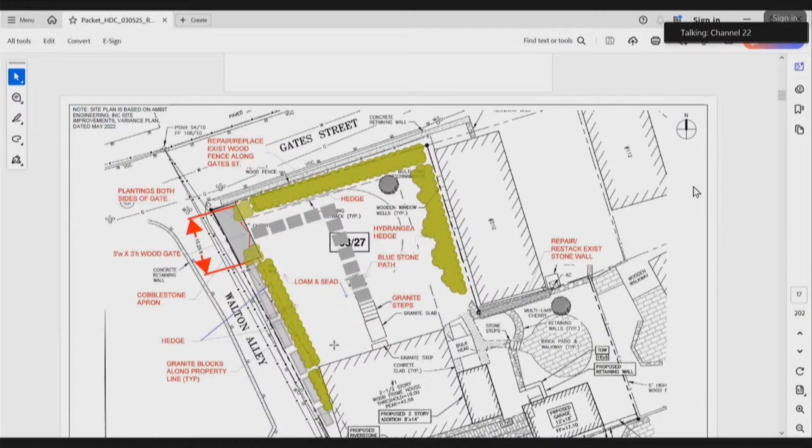The applicant for One Walton Alley was here last month. They are proposing to replace and repair an existing fence that in some spots was removed and in other spots needs to be repaired. That would wrap along Gates and Walton Alley. The other part is they were hoping to install a sort of country English style gate.

The commission was not entirely on board with that particular design, so the applicant has come back with this style design. It more closely matches the existing fence that's at the property that they would be mimicking as well.

I like the puppy. Any comments or questions on that? Anybody good with that? I would just say it's appropriate to what's there now, and I would support it. Great, thank you.

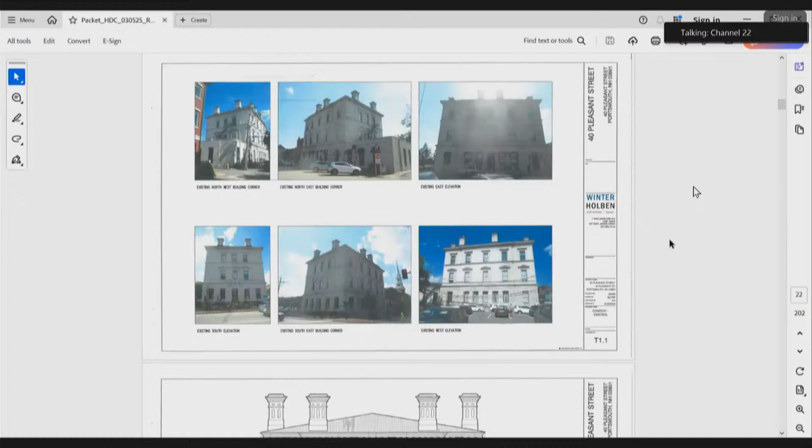That will bring us to item number 2, which is 40 Pleasant Street. This project actually came before the commission a couple of years ago. It has since lapsed. However, the only portion they're asking for this time around, with new owners of the building, is just for the lighting component. We have several existing photos, and they have shown all elevations where the lighting would be installed on the second and third levels.

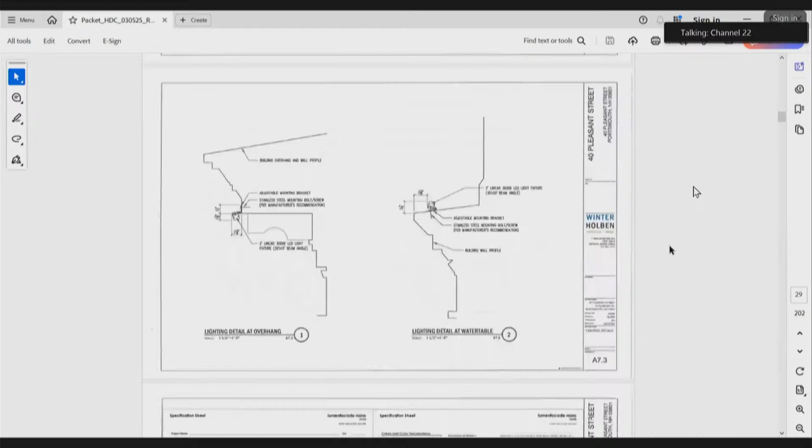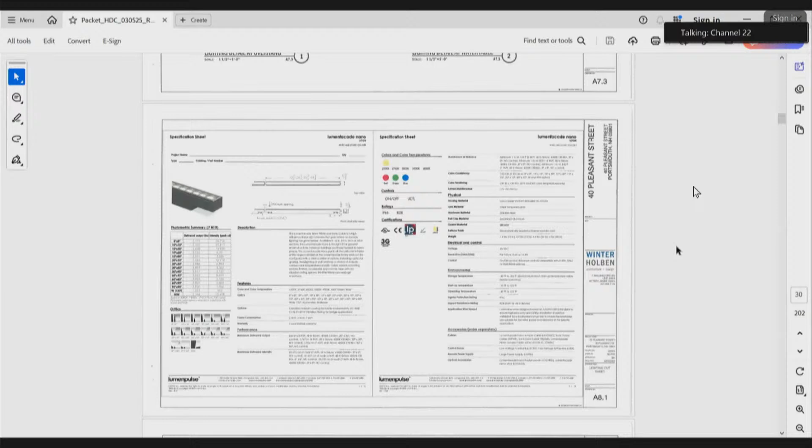We can see, of course, during the day, and then what a sort of mock-up at night would look like. They've also included a spec of how the light fixture would be installed and of the light fixture itself. Again, this was approved a couple of years ago. Any further questions on that item? Seeing none, I will move on.

The next item, number 3, is 39 Holmes Court. This project came before the commission about a year or two ago for a public hearing. What they're asking for, because it was not detailed in the plans, is for the decking and railings for a side entry and a third level emergency balcony.

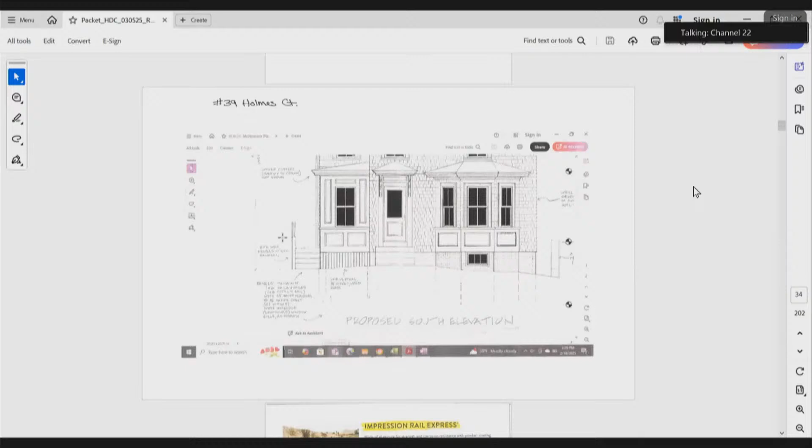Here's the elevation showing the entry where the railing and the decking would go. They have chosen this impression style rail in aluminum material in black, and then this would be the color for the actual decking. We do have a sample of that if anybody wishes to see. It is a TimberTech. Isaac, do you know what facade the escape balcony is located?

Already there, and they're just adding the railing? Exactly, yes. And that was something we did approve. It was needed by code for fire safety. It's just the material that's different. Just the material, exactly right.

All right, any further questions for that? Okay, we'll move on to item number 4, which is 43 Holmes Court.

Similarly, this project came in tandem with the 39 Holmes Court project a couple of years ago. What they're asking for is to change out just the brand of window. They were approved with a Green Mountain window, and they are asking for a LePage window, so of course it would be all windows that were approved for Green Mountain. This is new construction, by the way. And here are the LePage specs.

I'm not sure if anybody had further questions on the change. I believe it was due to the time frame of getting the Green Mountain windows. Does anyone have experience with LePage? That's a new name for me. It is a good one. Yeah, we've approved it in the last 3 or 4 months.

The screens, they did not say screens, but we could stipulate half screens if they're installed on the double hung windows, half screens. Okay.

Item number 5 is 93 State Street. This project came before us for a public hearing for a renovation. The last remaining items were the doors on State Street and Chapel Street. We did a couple of site walks. They have proposed 2 new doors that would be very much in style and in kind to the doors that are there now. Does anyone have further questions on the type of door or how it would be installed?

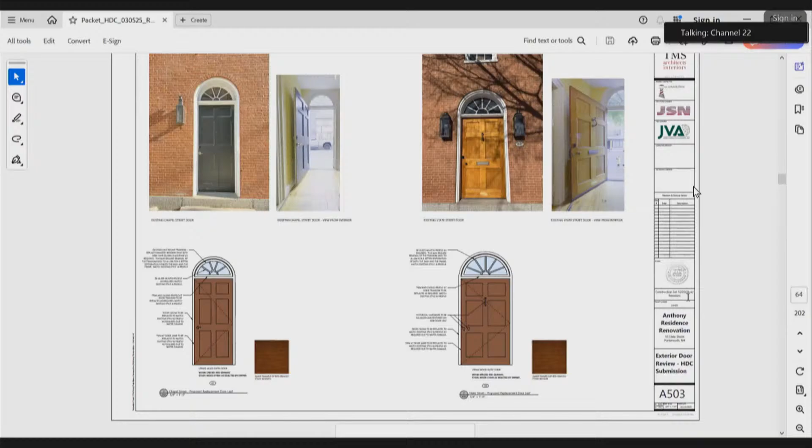I know we have the applicant here if need be. Yeah, I have all the questions in the world. Are these doors, the existing doors, does anyone know the age of these doors? Anyone that went on the site walk, because I was not on the site. I did go on the site walk. I don't know who else went. It's clear that the front door, though the wood is beautiful, is not an original door. It is older, but it's starting to...

It's not a lacquer. What is the finish on the door? Varnish. It's Holly, I believe it's a varnish and it's faded and warped. It's so thick that you can't refinish it. So you can't strip it and redo it again? Okay.

How are they intending to remove the frame? And I see something about the half round up top, but I'm not really understanding exactly what they're doing with it. Are they using the half round over again and putting new glass in it? Is that what it is?

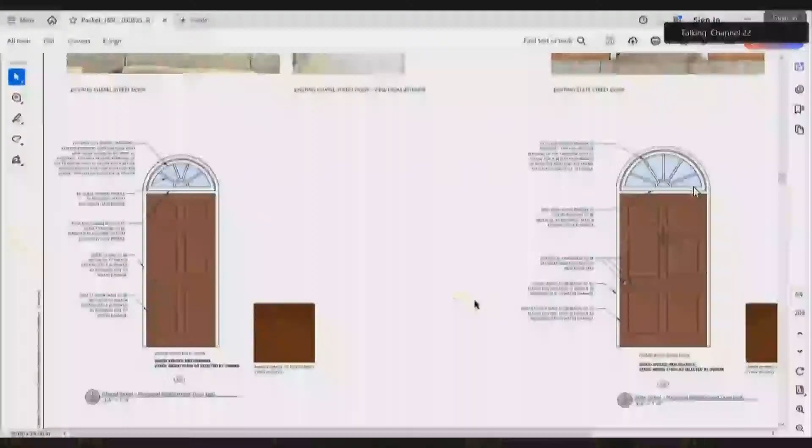So one of the panes has been damaged. Could you speak up a little bit, please? So one of the panes has been damaged, so we're replacing that, as far as the trim surrounding it, we'll have to replace that as well, just due to the nature of how you work with the existing window there. So that's the reason.

So you're only going to repair one broken pane? Yes. And where is that, on the front window? I mean, the front door, excuse me. That is on the Chapel Street side. So the front State Street side is okay? Yes, that's correct. And so would you be leaving that frame in there with the sash in place while you remove the door?

We're going to have the GC determine what makes the most sense in working with the window, the pane, and the unit. If he has to replace the entire trim piece, he's going to replace it in kind. And you'll be using the original hardware on that door, the hardware that's on the State Street side? Yes. Which was obviously reused on the current door. Yes, so it's continuing to use old hardware.

I don't know what to say. I don't want to vote against everything just because I don't like this project. Is it possible to pull it, or is it too late for that? Otherwise, I'll just vote against everything. I mean, we can pull this one and vote on it separately. Does anybody else have any concerns or questions about this?

That will bring us to item number 7, which is 121 State Street, Unit 2. This proposal is to take where a window used to be that has been bricked up and revert that back into a functioning window. As you can see, the window is located underneath this deck here, next to this set of doors. They are proposing to use a Pella Reserve Series double hung aluminum clad window that would match the windows on the rest of the building, in a 6/6 pattern as shown.

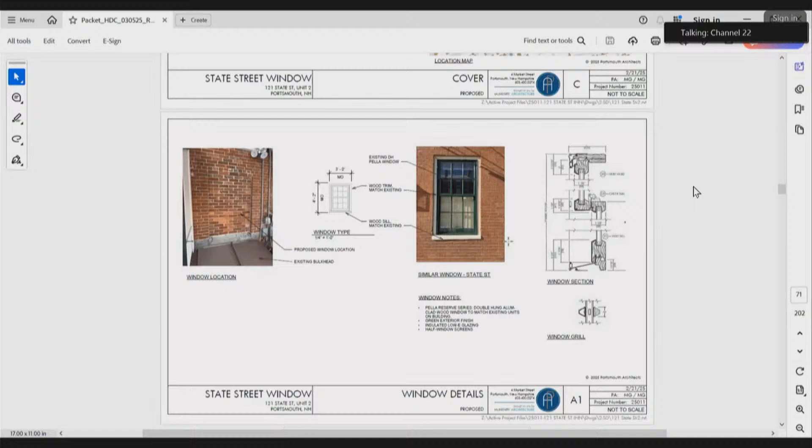With half screens, and a half screen can be stipulated if they do install. It's actually noted already. Perfect, window screens noted, as it's noted on the plan.

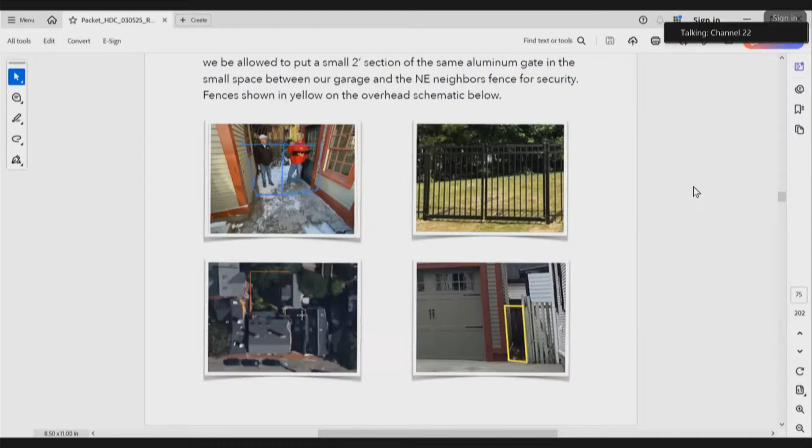Questions? My only question for this particular one is how the gates are going to be installed between the buildings. We have the applicant here who can clarify. They wanted to make sure the gates weren't being attached to the buildings themselves, but would be freestanding, with posts, and would swing from that rather than lean against the building. Okay, great, that's just clarification. Perfect, thank you.

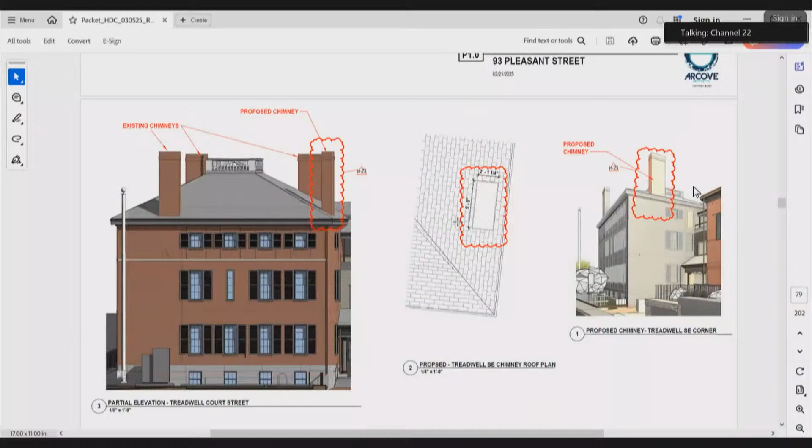Okay, so we will move right along to item number 9, which is 93 Pleasant Street. The applicant is here, and we've seen this project before. They are proposing two additional changes. One would be the addition of a chimney that used to be on the building and has since been removed. They would like to install that to bring it back to a more historic look. You can see the existing foundation right here, so they would propose to rebuild that. The second component of the application is for a series of porch awnings, which would be fabric awnings over a metal support, or a canvas fabric awning.

Not just simply to have something to say, but this is a groundbreaking project. We've had so many firsts on this one. I think, at least in my tenure, it's the first chimney that was proposed to be replaced on a building, and the first stone wall to ever be chosen to be replaced. It's a lot of firsts in this one. I think it deserves an upvote just on the basis of that. Kudos.

So our next item would be 10. Oh sorry, yeah, this one's fine. 10 Market Square is okay for you? I think it's just the last two, Larry. Yeah, the last two, yeah. Okay, so item number 10 is 10 Market Square.

Again, this property was before us last month for window replacements. They were asked to come back for administrative approval just to clear up a couple windows on the Ceres Street side. So we have just that.

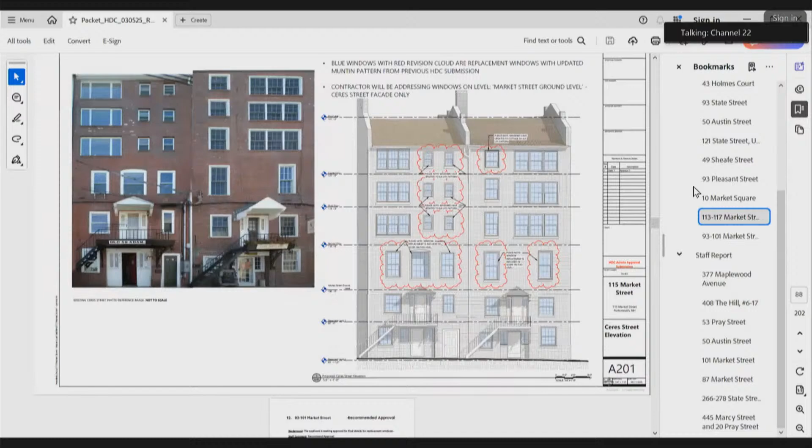Let me get over to the Ceres Street side. So here we are, I'll try to get that a little bit larger. And so here would be the proposed windows there. Again, it would be using the same brand, and they were just attempting to get a more cohesive look on the backside.

Do we have further questions on? Okay.

So we will move to item then number 12. This would be the property 93 to 101 Market Street.

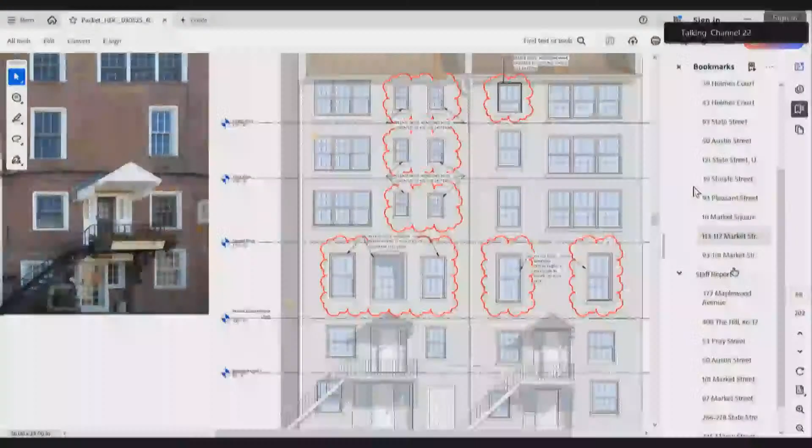Similarly, they were here last month for windows, same stipulation, just to come back and clarify some of the windows that we had questions on. So they have noted some of those window changes that we discussed.

And again, this just shows the front and rear sides. So again, just a more cohesive look between all of the varying sizes of windows. Same, again, same brand as proposed before.

It's nice to see them all presented in one plate like that so we can get an idea as to what's being accomplished. Thank them very much. Anybody else good?

Okay, well, I guess I sort of lumped those two kind of together. So if we are okay with voting on those together, we can do that, or we can split those apart.

I think we can vote on them together, they're very related projects. So if I could have a motion? So moved? Second? All right, all in favor? Aye. Any opposed? Chair votes aye.

Thank you. Just make sure they're half screened. Yes, that was part of the first one. Yeah, okay. All right, so we're through all the administrative approvals.

Next is our public hearing, new business. Number one, the petition of Kevin Shitan Zhang, Revocable Trust of 2017, owner, for property located at 377 Maplewood Avenue, wherein permission is requested to allow the demolition of a secondary structure and the new construction of a detached accessory dwelling unit and exterior renovations to the existing main structure to include new windows, doors, and repairs, and replacement of exterior features as per plans on file in the Planning Department. Said property is shown on Assessor Map 141 as Lot 22 and lies within the General Residence A and Historic Districts.

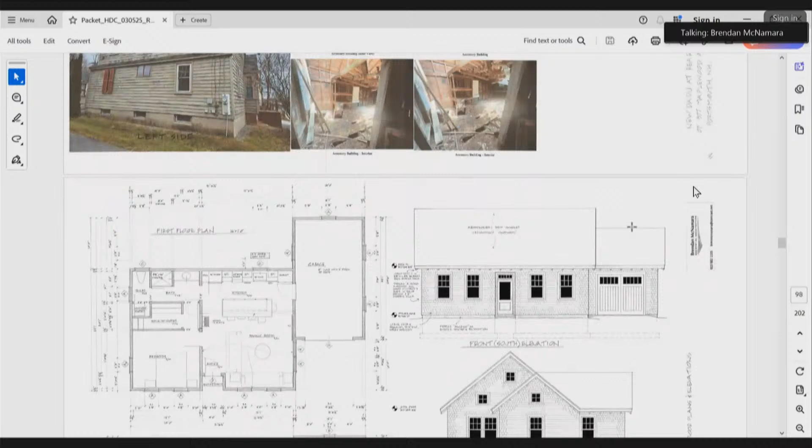Well, Derek has done an excellent job of his preliminary and has really covered the thrust of what's going on here. I think the plans are sort of showing what's proposed within the nature of the requirements of the detached accessory dwelling unit. The new building at the rear is meant to be diminutive to the principal dwelling unit, which I believe it is. So it is still in the manner of appearance of a more utilitarian building. And then we do have the repairs of the principal dwelling unit, which is in pretty rough state as well.

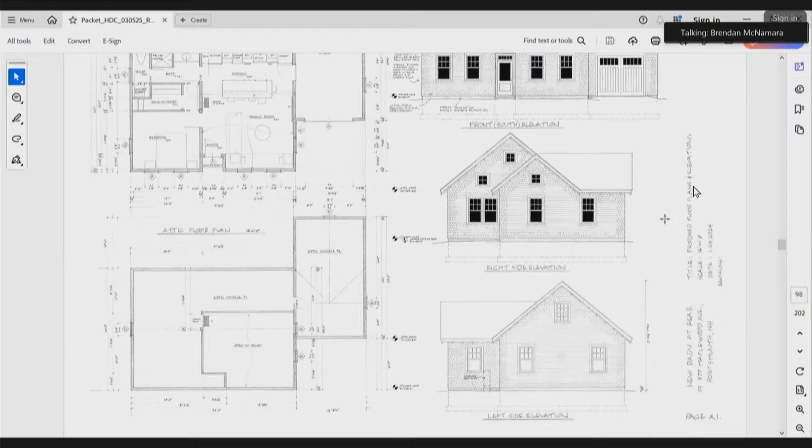Just to note, there is a specific change to the principal dwelling unit because of the need to create parking and turnaround. The existing bulkhead, which is on the rear of the principal dwelling unit, needs to be removed, but we still need to have egress to the basement area, which is why we have a grade egress window proposed on the front of the principal dwelling unit. I'm happy to answer any questions that come up.

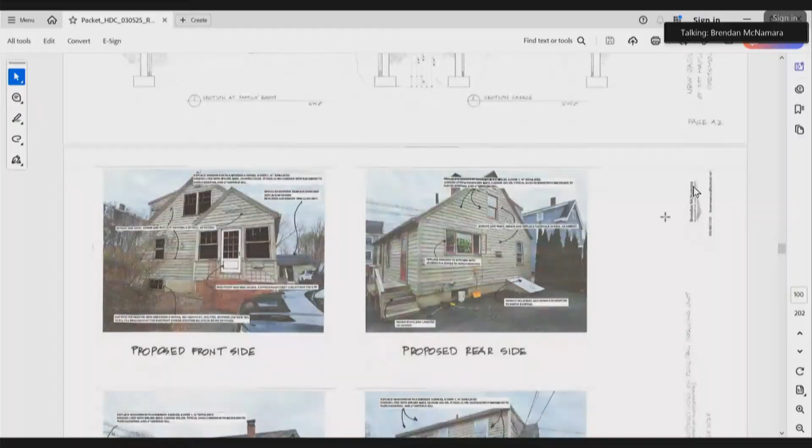Thank you. I'll just say I'm happy to see this project finally come back because it has been before us in drips and drabs. So any questions that the commission has or comments on the plan thus far? I'll ask Brendan, are there any significant changes to the new dwelling unit compared to what we had seen previously that you'd like to call out?

No, none at all. No, it's essentially just gone from a 1/8 scale sketch plan to a 1/4 scale plan. Okay, okay.

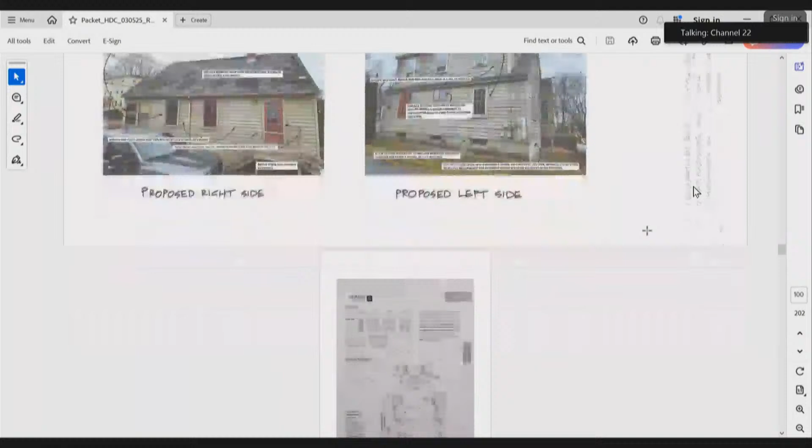Then the only comment that I have is I'm thrilled that this building is going to stay, the original dwelling is staying true to its form. We don't have many of these little modest buildings in the historic district, so I appreciate very much that it's not being expanded into something that it's not. I also like that a lot of the materials are being kept in kind, using natural materials. So I'm just totally in favor of this.

Okay, thank you. Anyone else? All right, not a lot of comments since basically we've seen this before and we were happy with it the first time around, so there's not much to comment on.

Well then, if there's no other comments here, I will open it up to the public. Is there anyone in the public who wishes to speak to, for, or against this project? No, I see no one rise, and I'm assuming no one's online. I'll close the public hearing and wait for a motion.

I will make a motion to approve as presented. Second. You want the findings of fact first? Okay.

I would say this maintains the special character of the district. In particular, it maintains the character of this building. And it is in relation to the historic and architectural value of the existing structures around.

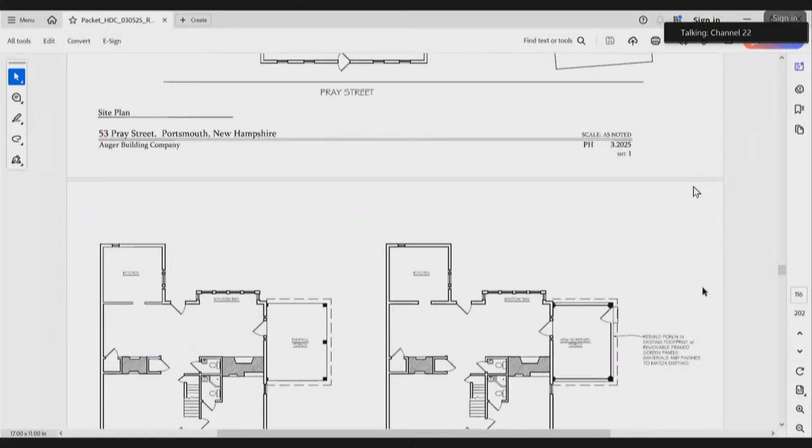I also went back and found, as part of the sale, the owner gave us copies of a previous approval, so I could see in 2010 what was requested. In some cases, what we're seeing here as repair, refurbishment, re-siding or re-roofing is actually doing what they were approved to do then that perhaps didn't get done. Other things are just general repair. You'll see pictures in the package with incredible ice dams - I've seen definitive leaks through the ceiling inside occupiable space. So we're hoping to get approval for the items we talked about previously, which are the most changed, and then approval for repair, replacement, refurbishment, and general maintenance to bring the home back up to a state where it'll benefit and have longevity.

So on the front page list, under repair and replace: the fence and gate, we're replacing that, slightly moving it inboard of the site. There's a new gate, so it's a new gate in a fence that will look the same, painted, very similar except where the gate dies into the corner of the post versus running in front of the post. We're doing a new copper roof over the kitchen, the shed dormers, and the back bay - that copper roof was approved in 2010 but not installed, there's wood shingles currently, so we're bringing that back up to par.

The gutters are failing, we're looking to replace those in copper. The windows, though we thought they may not have been original but certainly older, are Brosco windows, so we're looking to install LePage windows. We can do half screens on the double hungs, and a Brosco door is a new door we're installing. The roof we're looking to replace in kind - we really can't patch and match, so it'll all be replaced in Western Red Cedar. We noted some failing conditions and some incomplete conditions from the previous approval, and we're replacing an older condenser with a heat pump.

So the first couple sheets of the application are what you saw before - a site plan showing the building, the multiple outbuildings on the property, and the locus map as far as where it is in town. The existing porch on the side is what we're looking to replace as previously discussed - we'll build it new in its location, matching all the details, but with screen panels in lieu of it being open. The roof will still be copper with a pitch, but there'll be a sunken roof deck on top of that.

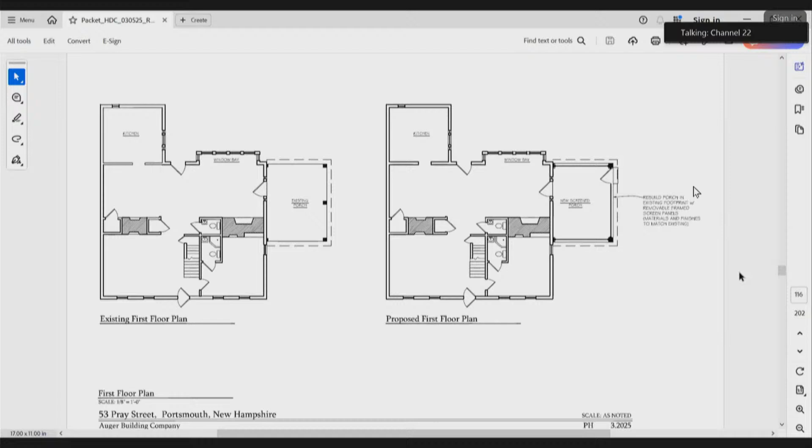On page 3, you'll see the second floor view, which shows the current roof over the porch and our new roof with the deck. It shows the new copper roof running across the whole back and over that kitchen bay, and then the new skylights, which are Marvin skylights we had talked about in our previous presentation.

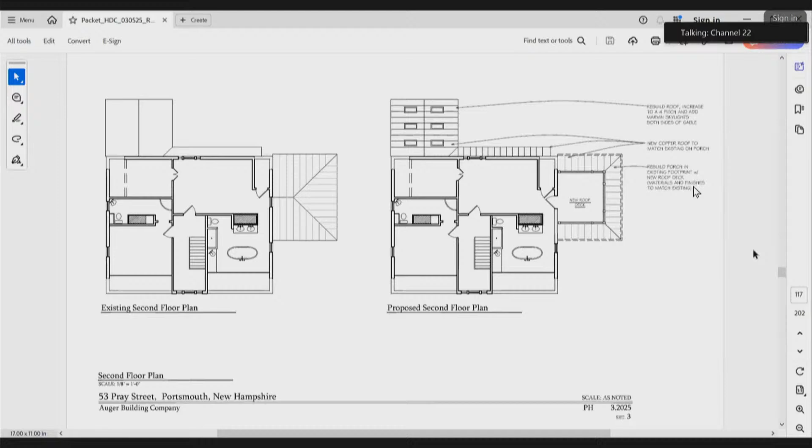The front elevation is on sheet 5. You'll see the home as it is. And as we prepared for what we're going to do, there's the new screen porch, the new fence and gate with just a little more stylistic detail to it.

This page also, during the sale of the home, there were 2 light fixtures that were taken. So the specs are in the back, but you can see a picture of that light fixture before it was removed. We've had a lighting company measure and fabricate, and they're going to custom build them to match what was there. Most importantly, the front light fixture, because that gave it character. The back one is set in a recessed area, it's a little less detailed, but we'll be replacing those 2 to match what was previously installed.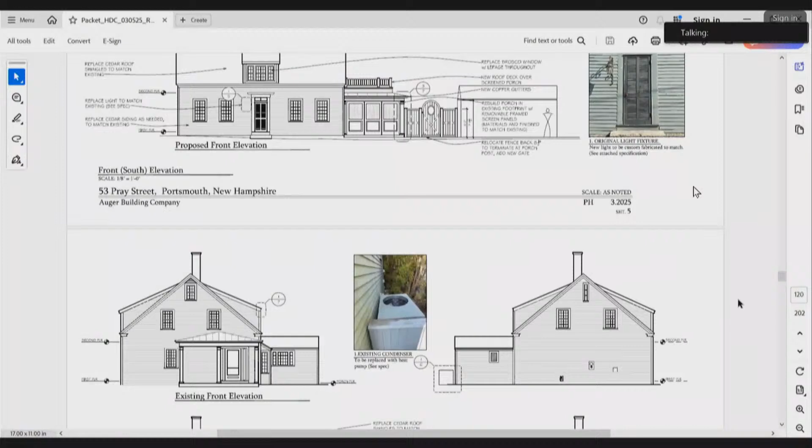Page 6 is the side views of the home. This is where, one point on this page is the condenser that's there behind that fenced wall. That's where our new heat pump will be located. And the front, let's see, we're calling it the front elevation, the side elevation here.

This lower right elevation is where there's evidence of windows were filled in. So if you stand there, you see distinct lines of where the siding is very, very fresh and new.

The back elevation, again, we're demonstrating the dormer conditions we'd like to repair. You're seeing the gate from the inside of the yard, the screen porch with the panels from the inside. There's the new metal roof, copper roof over what is asphalt.

As discussed during our work session, that bay, the one-story bay on the furthest right side is the kitchen. The roof is canted a little bit, it's more like a slight salt box. We're just going to right that and improve the pitch a bit for the new roofing.

There's also a picture on the top right showing the light box from the fixture that was there, that's no longer there. We'll be replacing that with a square decorative glass and metal fixture to match. We did get a photograph of that before, and this is a better picture showing the location.

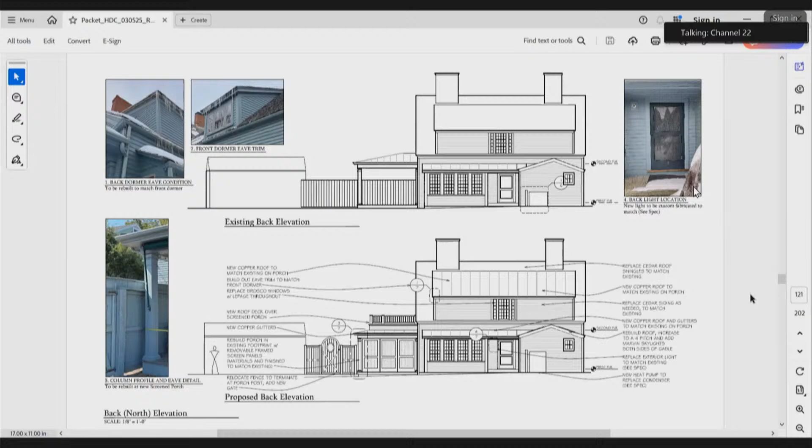On the next couple sheets, this is what LePage provided for an example. The interior of the windows are wood, the outside are not. The next 3 sheets are the specs for the LePage windows in this application. Again, grills will match what is there—simulated divided light. We'll do half screens. And we're also purchasing a door from them for that second floor roof deck. This should be just a couple more sheets.

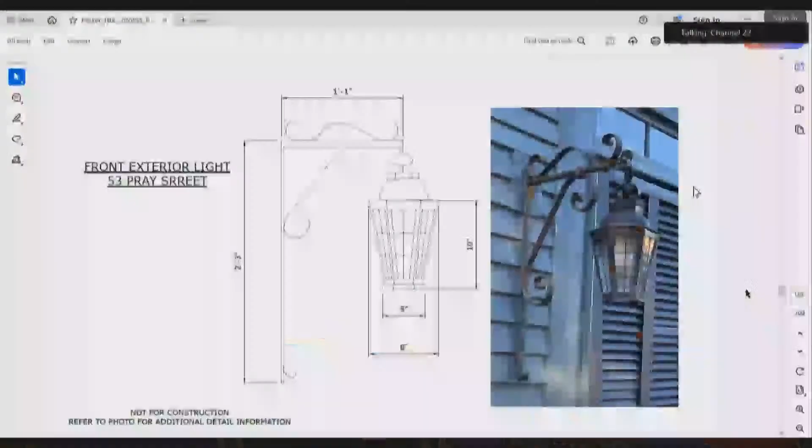This is the front—a photograph of the front light fixture, and a drawing that was created which will allow the metal worker to recreate this fixture. That will be replaced on the front. Right now you're probably seeing a very inexpensive hardware store light, just to provide some light and safety, but that drawing is what will be installed.

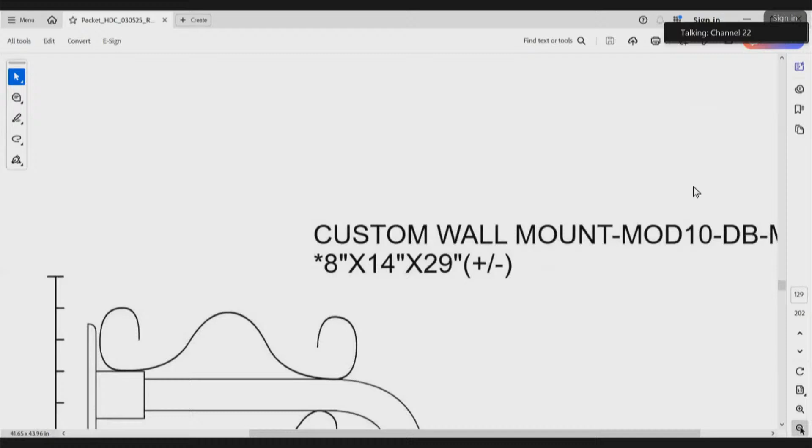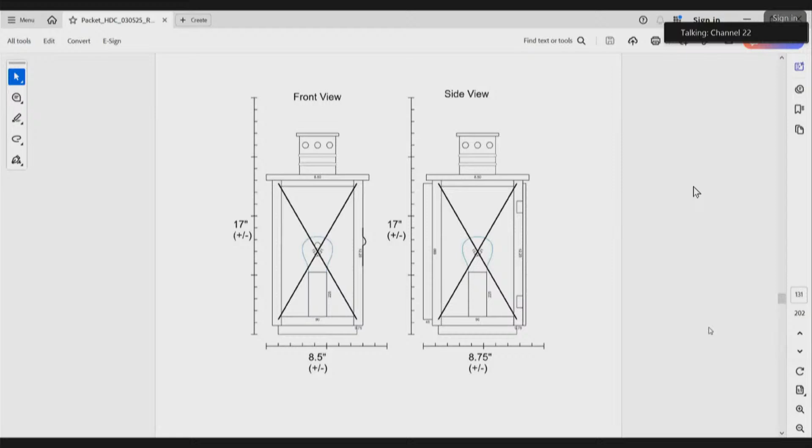The next page should be the back. Oh, there's a close-up detail—yep, more of his CAD drawing work. Then there'll be a back light fixture if you keep scrolling down—that one. You can see there's a photograph of it above. It's quite small, but we took the dimensions, and the same effort will go into recreating that light fixture. There are 2 lights on the garage that stayed in place—those aren't going to change, they're in this same family.

And then this is our heat pump. It's slightly narrower, slightly taller, still in the same location, tucked behind the house. No one can see it. That's right up against the row of arborvitae as well.

So the scope is expanded a little bit, but we think it's all in the betterment of the project and relatively straightforward in terms of maintaining the quality of the home.

Yes, Mr. Booth. I think you've put a lot of thought into this. It looks, like I said, very well thought out, very tasteful. I do have just one question. The second floor windows where you're going to have the walkout deck, clearly the door is going to have to be bigger than that window hole that was there. I didn't see anything on what the door was going to be other than the drawing here, but is that your intention then, that it would be divided light on that door?

It's slightly larger than the window that's in place, but it's in the same opening, so we're just going to widen it equally on both sides. Okay, I think it's growing to a 210 door. I think that'll work well.

Yes, Mr. Ryan. It's a great little house. Yeah, it is, very simple. And some of the moves that you're doing seem to be a little more complex than I think are necessary.

Your porch - I think what you want to do by having that walkout on the second floor is wonderful. I'm just wondering if you could tone down the detail a little bit. Looking at that porch, you have a rail, you have clapboard, and then you have roof. What if you were to just start the roof at the base of the rail, where you have that coping, and start it there? Because right now it looks a little fussy and over-detailed. Why do all those steps when you could really just do, instead of 3 steps, 2 steps?

Sure, so you're suggesting take down the parapet, the solid clapboard section, and start the railing right at the top. Part of it was to provide some privacy, so when you're sitting there, you're not fully exposed. It is sunk into the deck a bit, or to the roof rather. So we're trying to provide a little bit of not fully out on display.

If you look down the water elevation of that home, many homes have decks. They are the closest, so they're out there kind of front and center, and everyone else sits back and looks, if they wanted to, at them. So part of it was from a privacy standpoint. That deck's off of a bedroom as well. You're not going to, it's not going to change the amount of privacy. The rail's going to still be at the same height, the top. It's just that the roof is going to start at the base of the rail.

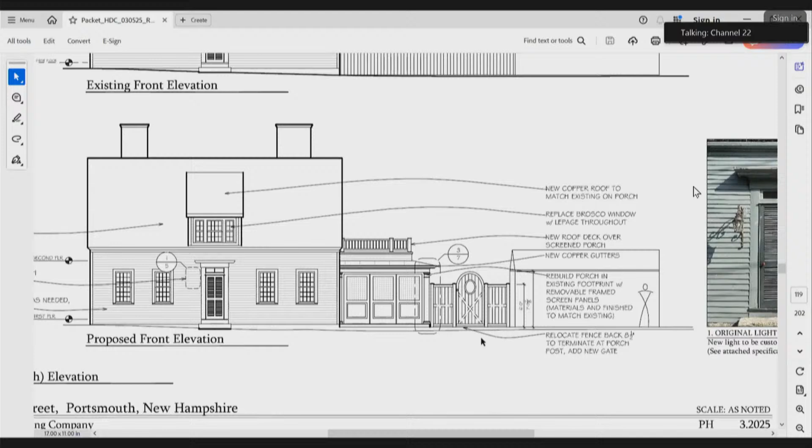The only difference is as it wraps around - okay, because the roof over the window bay is steep. That would probably be, we could probably get it close to that, so those 2 roofs would be parallel to each other if you think about it, looking at like the side or back elevations. I think that would be fine.

Do you think, Ben, that they'd be opposed to that? I don't see why you couldn't. More roof? We'd be steep, we'd just be increasing the apron pitch of the metal roof around the sunroom.

Okay, we could make that work. Would that be something you'd like to see redrawn, or do you trust me? I could trust you. Okay.

Well, Chair, I have no problem with Martin's suggestion. I think, as one person making a suggestion, we have to be careful that it's the will of the board. So I'm just going to chime in now that I have no problem with this suggestion. Okay, good, thank you. Would you like to say something, Ben? Yes, please. Ben O'Shea, the contractor.

One thing with changing the pitch of the copper, we wanted to maintain relatively low visibility of that copper from the street. So now we're seeing it at a quite shallow angle. If we raise it, it's that much more prominent, which is a change. We can certainly build it steeper, but it changes how that roof presents. I think it'll be more in line with the existing, like what you have as existing.

The baluster, with a rail around it. Right, okay.

How does the rest of the commission feel about this suggestion? I like the simpler lines. Okay, just making sure we're all in agreement. I'm fine with it too.

So what we're doing, just to be clear, is eliminating the solid part of the rail, the vertical, and just carrying that up to the clapboard wall. That works. I just think it would simplify it and make it fit more to the house that's currently there.

Sure, you can play with it, figure it out. If it doesn't work or you need to tweak it in some other way, you can certainly bring it back to us for administrative approval. Next week's the deadline, and we could get this looked at fast and submitted for you. Okay, thank you. Any other questions or comments on the plan as they've shown us?

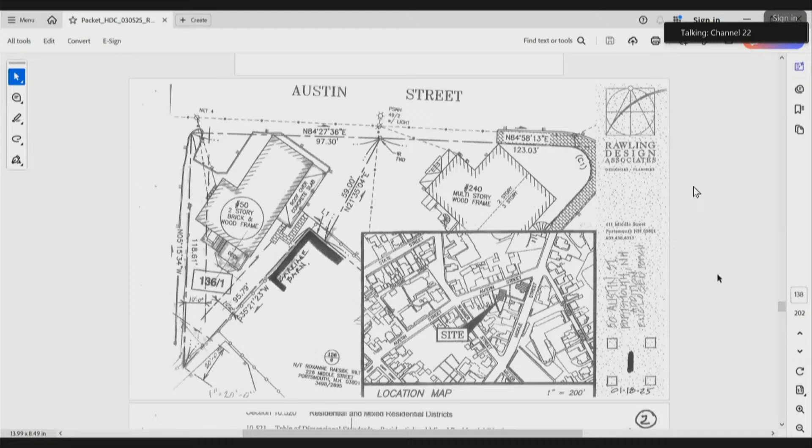Thank you. Please introduce yourself. Is this correct? Yes. There was one typo here, the name is Maher, pronounced Mar. Okay, thank you. You would have been right if it was an A.

My name is Sky Mar, and I am part of this trust. And this is my contractor, John Crocker, of Grove Homeworks, he's the man on the job. He's here to answer questions that I don't know anything about.

This project came before you, I think 3 or 4 of you were on this board 5 years ago. We had a work session and hashed through lots of little details, and I'm hoping we don't have much to do on it now.

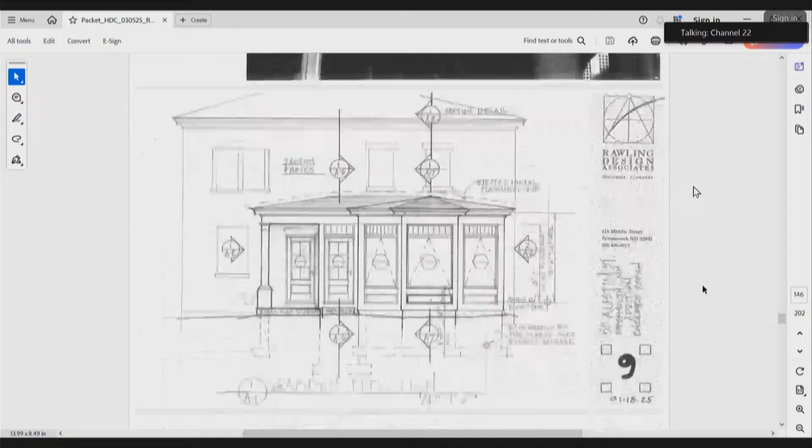We have made one change, which is just an insertion of a door where there was a fixed window. I asked to have a smaller fixed window and a new door on the side, which will make it easier to get myself in and out of the building. This is going to be a residence for my husband and myself. We are taking 2 apartments on the first floor and combining them into one, and this sunroom will be on the back and allow us to enjoy spring and fall.

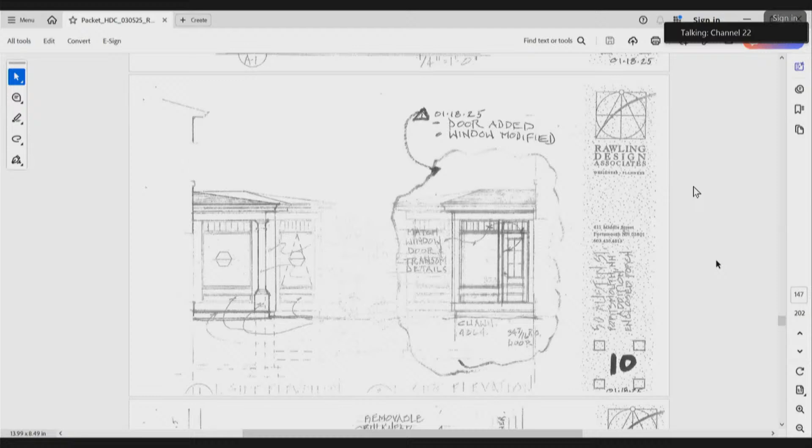If you have any questions about the new door, perhaps we could address that first, and if there are other questions about the larger project, we can go back into that.

It's sort of hard to tell from the existing photographs because they're dark black and white copies. Can you present a little more clearly where this new sunroom was going, and which of the doors are changing? We stop right there.

That is the rear of a building that was originally a carriage house, and there's about a 15 or 18-foot addition on the back that appears to have had a residential intent at some point. There are 2 odd doors in it. The one to the right with a storm door is only about 26 inches wide, a very narrow door. The one to the left, I think, was original to that addition.

I am proposing that the little sunroom will go from the left of the window, where there is a bulkhead, and it would enclose the bulkhead into an interior access, and go to the right of the door with the storm on it, terminating at the right side of that building.

Yes, I can give you some. We did submit the specifications for the windows, and they're a Marvin window. We're proposing to have the windows built with a mulled fenestration and the transom mulled to the opening window. We see there 3 opening windows, which would be the basic wall of the curve of the building, and fixed windows on both the right and left-hand side of the building.

Any questions? What happens to the original window and door on the right that'll now be enclosed in the sunroom? Well, that window goes into what will be our dining room area, so it stays. The door goes into the kitchen and will remain a door; the interior door isn't original, it's just a single pane door now. So there'll be no change to the brick or lintels? No. It's a cute little sunroom, no one's going to see it. I like the design.

Anyone else? Any other questions or comments? I recall this design - I thought it was two years ago, but time flies. I think this is a wonderful little design. I have no issues with it and I think I can support this. Liked it the first time, like it the second time.

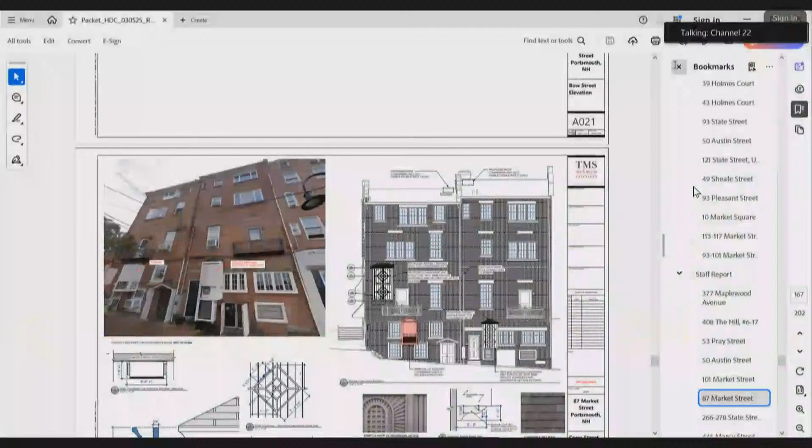Number 6, petition of Matthew Morton Associates LLC, owner for property located at 87 Market Street, wherein permission is requested to allow exterior renovations to an existing structure to include removal and replacement of existing wall-mounted condenser units to new locations with screening and the installation of new roof-mounted condenser units as per plans on file in the Planning Department. Said property is shown on Assessor Map 106 as Lot 43 and lies within the Character District 5, Downtown Overlay and Historic Districts.

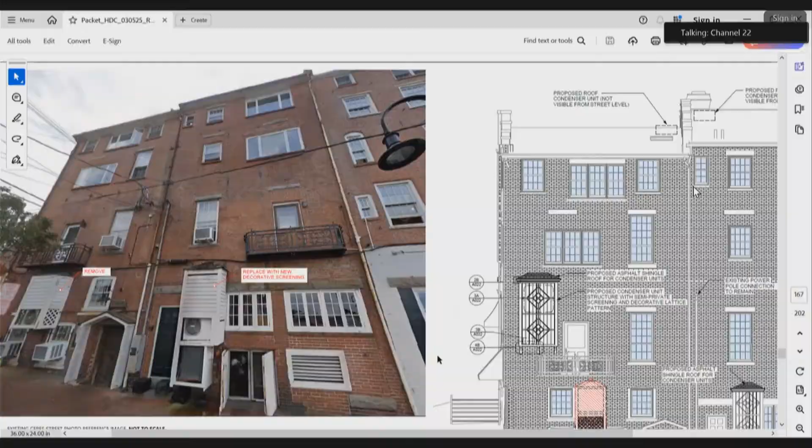Hello again. Hello, Tim Jaguar, TMS Architects. Thank you. All right, please present this.

As you can see on the left, the existing building has a few air conditioner units hanging out the window, and down low there are some exchangers for mini splits hanging off the wall with a white fence on it. Some of the fence has fallen off, or just wasn't made to get more airflow in there, and you can kind of see those condensers.

In the proposed view to the right - if you could leave both images up, I can explain. The box you see in red down low is the condenser unit you see on the left of the picture. We're proposing to remove that whole condenser and move it up to the upper left of the balcony that you see in that photo.

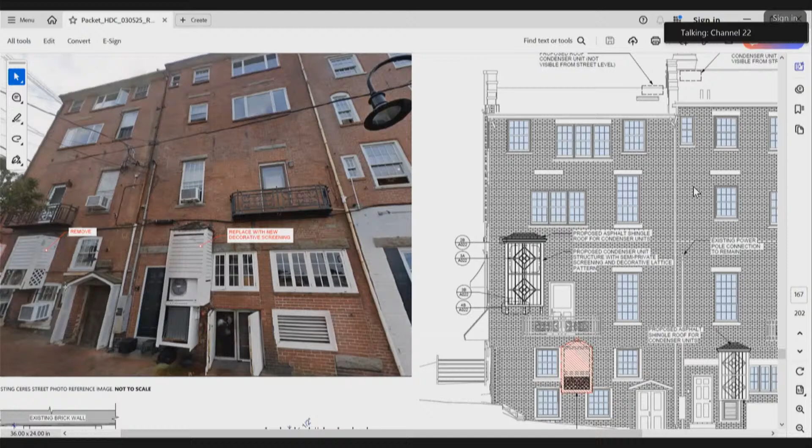Oh Dan, can you go point to that if you don't mind? Oh, perfect. Does this work, or am I messing you up? Should I just stop clicking things? Yeah, just don't touch it. You can come up and be our Vanna White, just don't touch the screen.

If you want to point to where the existing one is in red - yeah, and then we are moving that location up to the left. A couple things this does: it's kind of a back alley Ceres Street, not really, but these things make it feel like it. We're taking this up out of the pedestrian scale as you're walking by, going to Izzy's and whatnot, and putting it up higher, which is going to help. There's also some trees on the left-hand side that will help block this a bit and keep it out of sight, out of mind.

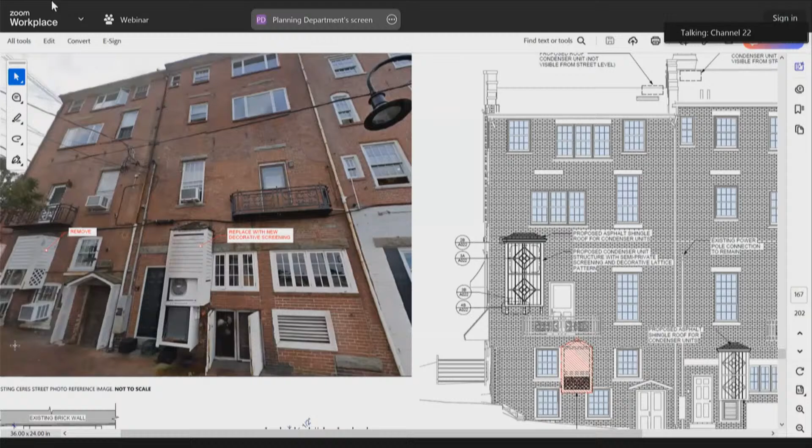The one on the right is going to remain, but we're going to redo the cover of that. Both covers we're proposing to do out of Walpole - it's a cellular, non-rot composite component that can have paint applied, so it looks like a painted wood product. We're going to make a little fenestration on it - the slats you see have airspace in them, allowing air to go through, so it'll allow the mini splits to operate while screening them visually from everyone. We put a pattern on it to give it some texture and undulation, a little interest if you do look up and see them. But all intents and purposes, we're just trying to put lipstick on the condenser units hanging off the side of the building now and make them look a bit better.

I think that's a really interesting approach that we haven't seen before. So, yes, Mr. Adams, I noticed in the drawing of your proposal that there aren't any air conditioning units hanging out the windows of the building. Are they all going away?

Yes, excellent. There'll be mini splits up on the roof, which I think is part of this proposal, right? Yeah, we've seen them. So the idea is taking them out of the pedestrian scale, putting them up high where maybe you've seen from the 100 Club, but for the most part that fits in with the program of the Historic District of making all of our architecture more accessible visually with people.

I totally agree. I think when you think of historic Portsmouth, it's about the pedestrian walking by, being able to touch and feel things, and just getting that out of their eyesight so they're not seeing a condenser unit. Of alleyways in various places in the world, this is a very popular one. Next question.

I think this is a place you could put some slate. What do you think? Where, on the roof? On the roofs, this is visible slate roofing, in the back of the building where there's slate roofing now, and you've got a bunch of slate.

In poor condition, I don't know what the... Not every single one, you know that. That is true, it is a big expense, and I don't know the condition of this roof. Is this roof part of the... you're talking about the condenser roofs, correct? Or the roof of... you're talking about the little roofs.

So you think this is more visible? I think that they're just as visible as you come around the corner. If you go over, scroll to the left. If you're on Penhallow Street, you're going to be able to see both of them. In the photograph right there, you can see the one, you can see that it's a little wood shingle roof on that little thing.

So again, that's a suggestion. I don't know, is everybody talking about the little roofs? Yeah, I think the little roofs could... the two little roofs, just the condenser roofs. Yeah, she's not talking about the big roof. It's just the little bit over that.

I'm not interested in having a conversation. Okay, it's a tough thing to concede for my clients, just on a cost basis. But it's something that we could review and determine. I don't know if we're ready to make that concession.

I think it's recommended as a consideration since you have the material. You wouldn't have to buy any new material, and it's very small, two tiny roofs over condenser covers. It's just a suggested consideration.

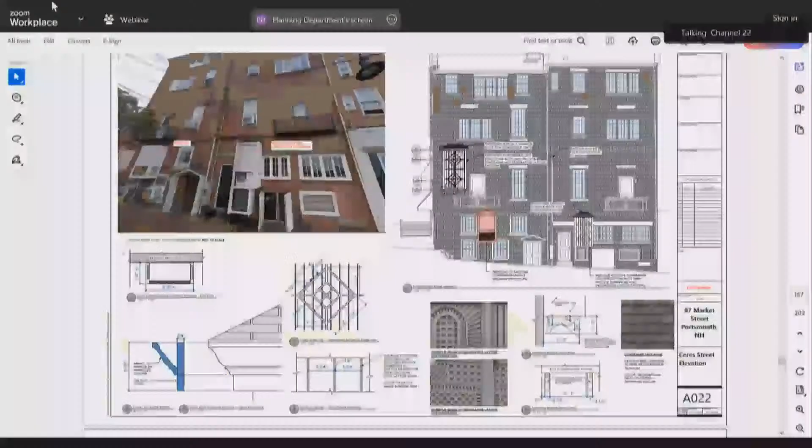And then below the unit that is staying in its location, there's this heavy box in mechanical. Yes, that will be staying the way it is - it's not being changed or incorporated into the screening and structure you're talking about.

Well, it looks - is it? Yes, it's going to be staying most likely. We're kind of working with the mechanical units now, and we're hoping we can squish everything up inside of that box that's shown. But if not, then it would stay kind of as it is, underneath it.

I think there are probably several hundred different designs you could put on these boxes, and trying to figure out which one strikes that balance between, oh look at that big huge white thing hanging off the brick building, and striking that balance is difficult, especially when they're so close to that ornate wrought iron piece.

I just wanted to add that I love the fact that you're doing this, regardless of some of the back and forth about how it's being detailed. I'd like to, at some point, turn to other applicants in the future and say this is how it should be handled, so send them my way. I'm sure you guys do fine as architects. So I don't have a problem with the pattern.

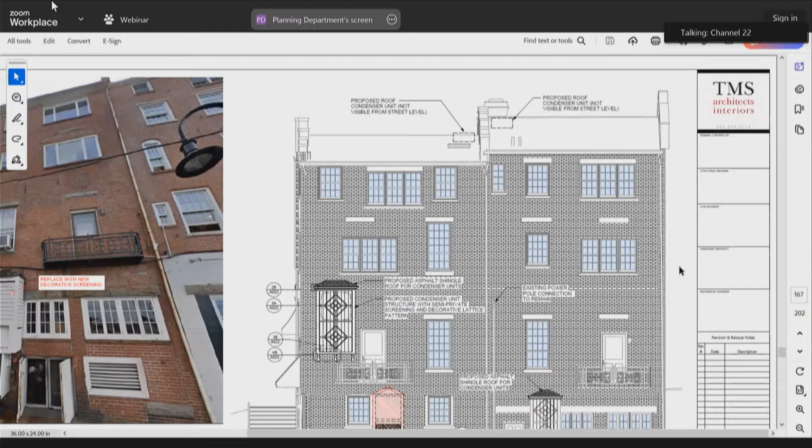So you're leaving it as a vent, just in case? And that's on the front slope. Yes.

Okay, any other questions? I think we are mostly resolved. Anyone from the public wishing to speak to or against this project? All right, seeing no one rise and no one online, I'll close the public hearing and wait for a motion.

I'll make a motion to approve as presented, with the stipulation that the caps of these projected elements be brought back to us for admin approval. I'll second that. Is it metal roofs? With metal, yeah. Okay, any other questions or discussion?

Findings of facts: it preserves the integrity of the district and is consistent with the special and defining character of the surrounding properties, and it makes some really lovely improvements to Ceres Street. Thank you very much.

So then the other issue that had come up was the punched windows that were shown across the interior of the step-back addition on 84 Pleasant Street. Again, I made them a little bit deeper, a little bit wider, grouped them together, mulled them together, and then grouped them a little bit differently. Trying not to go overboard on this because it does look out on a condenser farm down below, along a corridor. And really, particularly from most of Pleasant Street, this is set back 20 or 25 feet off of Pleasant Street and up behind the ridge of the roof, so trying not to go overboard on that.

So are those condensers on a flat roof? Yes, we'll take the backside of the ridge off of it. I don't know if you've been following the travails of the HDC, but we've had a problem with approving condensers. Apparently the code or contractor or somebody says they have to be elevated 18 inches off the flat roof, and so all of a sudden they're pretty tall. I've tried to take that into account in where we are right now. Obviously the system hasn't been designed yet, so I don't know the absolute size of those condensers, but whenever I go back and look at it, I'm trying to look at what's the largest condenser package that could be there, and then it would be up on legs.

That was quite a surprise for us. We had a project where they were blindsided by what the actual requirements were. So don't hesitate to pursue your parameters. I think by the time we come back for the public hearing, we'll have that further resolved. I don't know if it'll be completely resolved, because that again is an engineering solution. Well, like I say, we have one where they thought they were fine and they weren't, and it caused, so far, an unresolved amount of consternation with their neighbors, and it doesn't land well in our laps. Yeah, we didn't do it, but it was done.

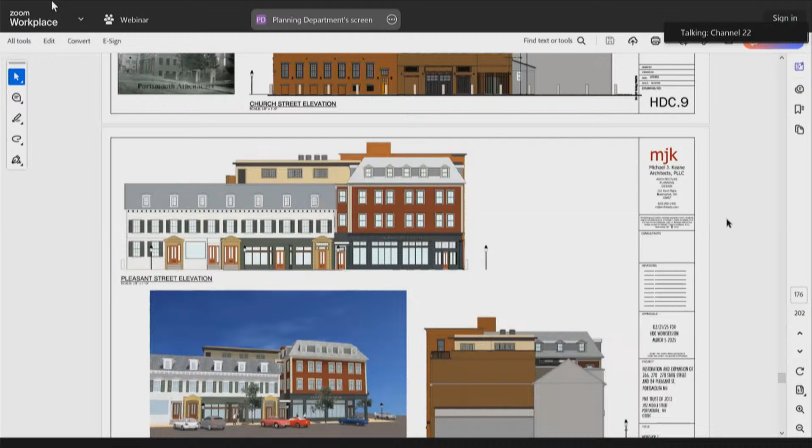I had a question. What is it that we're intending for the materials of that wall? Which wall? The siding? What you see as yellow, where the new windows are, where you've redone the windows. Yeah, it's probably going to be a siding, likely not clapboards. Definitely not EIFS or stucco or anything like that. Just out of curiosity, because everything is just one color at this point, but I kind of know where the clapboard is and where the brick is.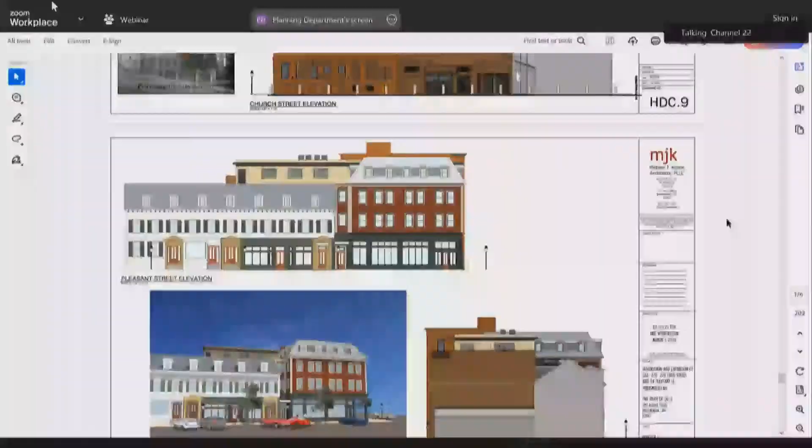Any other comments on the windows, that section there, that it really is not going to be very visible from the street? I think this view does you a disservice. I don't think you'll ever see that view. Just the people in the apartment up over, just the people upstairs, right, because it's taken too, like, from inside the building across the street into the building. And I think you might want to just pull that tighter. I don't like what's up there, but I know you're not going to really see what's up there.

If it's still available to us, when we came for the public hearing the last time, we were able to import our model into the city model, and then we could see it from all around. So once we've got things refined, so staff isn't having to redo it a hundred times, once we get that pinned down, we'd probably like to import that again so we can physically see it from street view. That'd be great. It may be wholly my problem.

I just thought it looked an awful lot like we were looking at a correctional institution or something like that. It's not great, but I'm sure that it's not great. Well, this is why I asked about materials. I feel like if it's some sort of softer material, if it's not quite that institutional yellow and green that it is right now, I think it probably can look a little bit better. I think when you see it in the rendering, it might look better. Yeah, it's toned down, it has to do with how the sun's hitting the model. It almost lends itself to good old institutional dark bronze or something, that every storefront was. I agree.

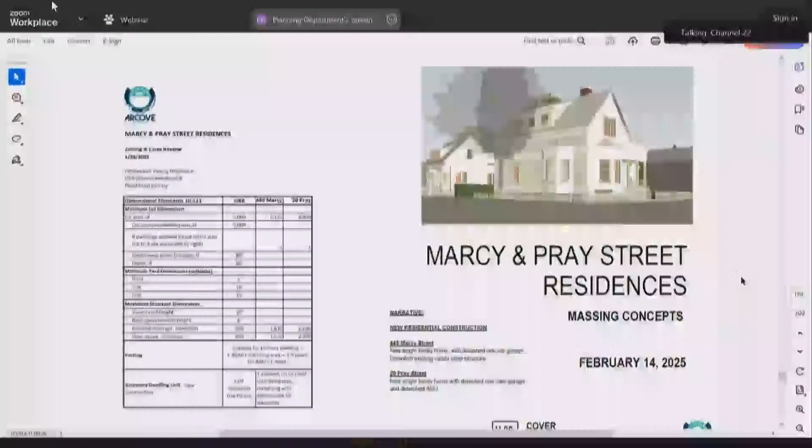Wasn't it moved there? Yes, it was originally from Newcastle. It was a summer camp built, we think, in the 20s. It was purchased by Ashley Jones in the 50s - prior to that, the houses that were here were demolished at some point. There used to be a cluster of five little houses here historically. By the 1950s they had all fallen down or been torn down, and then Ashley Jones, who lived across the street, bought this little summer camp shed, had it trucked over from Newcastle, and set it up in the yard.

And ran a candy shop/gift shop there for a few decades. I remember going there as a child and buying fudge and fancy clamshells. It was purchased by the Sanders family in the early 90s and was just used as a banjo practice shop, and then they had these great Halloween parties once a year.

That's pretty much it. I did bring a supplement to pass out with some additional photos of the candy shop, and there is one other change we've been looking at, which is on the Pray Street lot - to flip the same house design, but flip the ADU garage to the west side instead of the east side, and move the driveway. I'll explain that more when we get there. So the second page has more photos of the candy shop.

It was built in 2 parts, as you can see, and it's a little bit awkward the way they pieced it together. It was originally about 17 feet by 10 feet, just a gable shed, and after it was moved to this site from Newcastle, they added that porch across the front with all the windows. It's bizarre because it's so small, the ridge of the porch addition attaches pretty much to the ridge of the shed, and it's on a CMU cinder block crawl space.

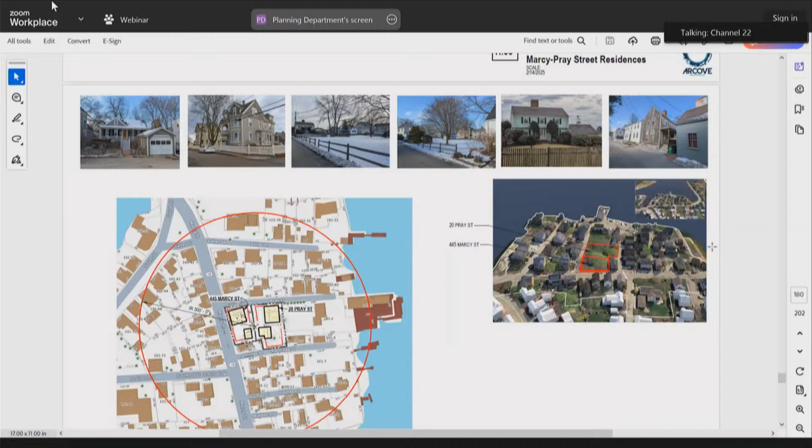The site plan is the latest, and you'll see that there's no change at all to the Marcy Street property. On the Pray Street, the house is the same, we just shifted it left by about 12 feet, or west 12 feet, and put the driveway along the eastern property line instead of the western property line.

The reason for that is this property buyer really wants to have a pocket garden, and that's the priority on both parcels, a really beautiful, small, contained pocket garden which can be enjoyed in the afternoon with the afternoon sun. We found that by putting the garage and ADU to the west, there would be shadows at that afternoon time of day, so we put it to the east, where it won't affect the time of day in which she wants to enjoy her garden.

The other thing you'll see is that in the original we had the ADU and the garage side by side, connected, and now we've pulled them apart to be separate buildings. They're both a simple gable, but they're separate outbuildings. Other than that, no changes to what was previously presented.

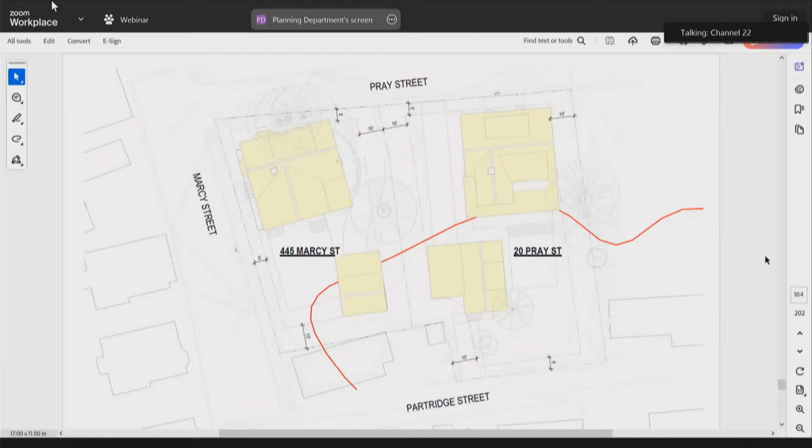So I'm happy to go through, I know a few of you weren't here the first time, so I'm happy to just briefly explain the context, but stop me if you have any questions.

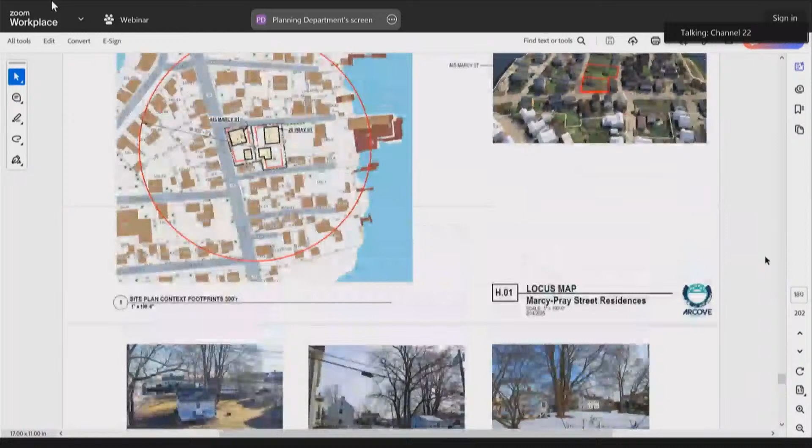On the first page, page H01, that's the locus map. This simply shows that the footprint and scale are in keeping with the pattern of the neighborhood, which has a lot of single-family houses with outbuildings in the back, which are smaller.

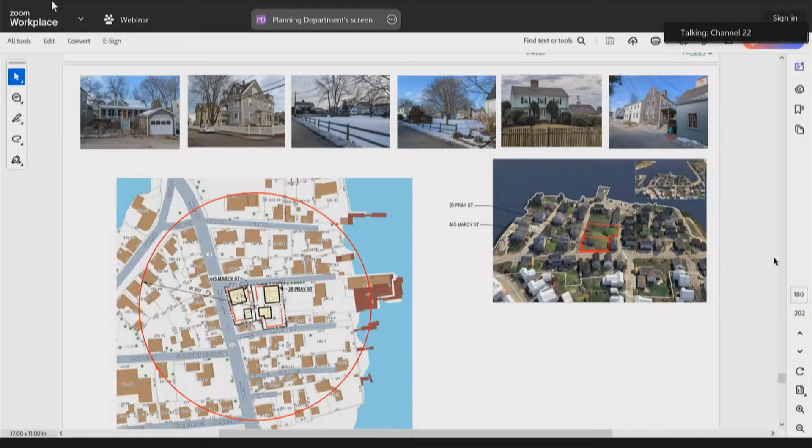We are dealing with a flood zone here, especially on the southeast corner of the Pray Street property, that's within the 100-year flood zone. So we are taking special precautions to keep the first floor living areas above flood level, especially seeing what's happened over the recent years, we want to make sure we account for that.

On that same first page, you'll see the houses surrounding it are of different eras, ranging from late 1700s to mid 1900s. There's a variety of styles, we have Federal, we have Queen Anne, we have a Royal Barry Wills Garrison right next door, there's the Cape across Marcy Street with the porch.

And then we already talked about the candy shop. The next page, H11, is a closer up site plan where you can see the 2 parcels, 445 Marcy and 20 Pray.

They're fairly similar in the idea that it's a kind of cape style. So it's a 1-story structure with an attic, a second story, and a back L with a porch, and a detached garage. 20 Pray Street is a larger parcel, and that's the one that has the ADU.

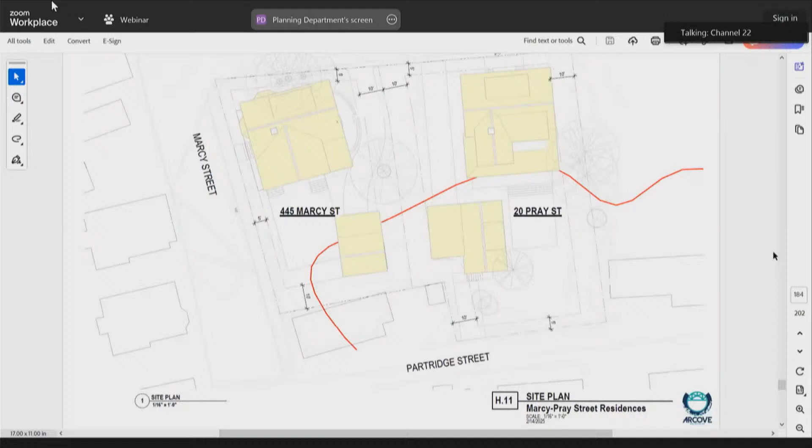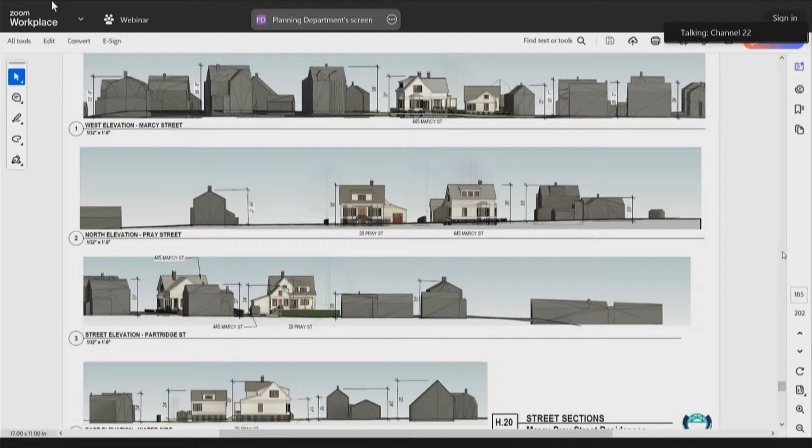H20 are the street sections with relative heights. You can see that these buildings are lower than the average. If you took an average of all the buildings around it, it's at or below the midpoint, so it's in scale. The next few pages are street level views. The two-dimensional elevation drawings are in the original packet, and we can go through those as well.

Looking for initial feedback, I'm happy to answer any questions. There's a lot of detail to go through here, but my initial question is, it looks like you have all these vertical elements all around the foundation.

It's a screening. Are you planning on, when you have the house up into the air, to actually have the ability for water to flow underneath the house? Yep, this design would be a vertical wood lattice screen. The house would actually be built on posts, on piers, so the water could go through at a flood event without affecting the living area.

We're proposing the first floor to be at 15 feet. The grade at the upper corner is 12 feet, so that's a 3 foot height difference. So the steps going up to the front door would go up 3 feet on Marcy Street, and it's a few inches more on the Pray Street side, since it starts to slope down a little bit.

That's very good. You're right there, on the cusp of - I've actually been in your old house also, so I know why it's so concerning to you. Yes, well, eventually we imagine that most of the neighborhood will probably get taller over time.

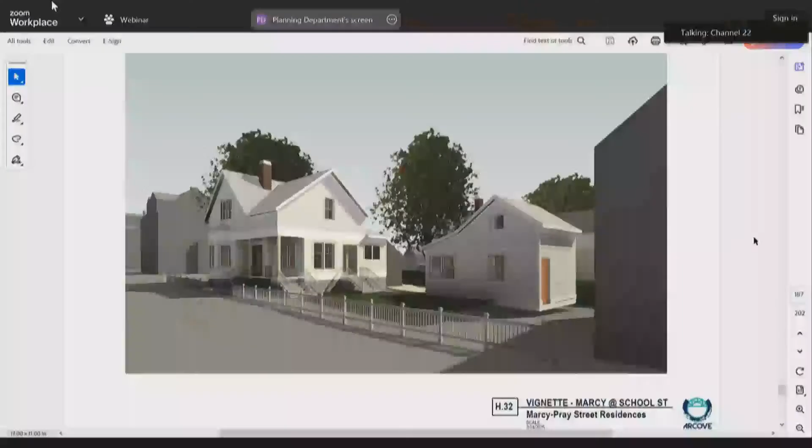One of the things that's interesting about this is the eave height is basically the same as everything around it, but it's only a one-story house. So what that means is we have a very tall floor-to-ceiling, an 11-foot tall floor-to-ceiling with very tall windows. We've adjusted the scale of everything proportionally together to make it read in balance with what we would see in a cape, but the actual floor-to-floor heights are a little taller.

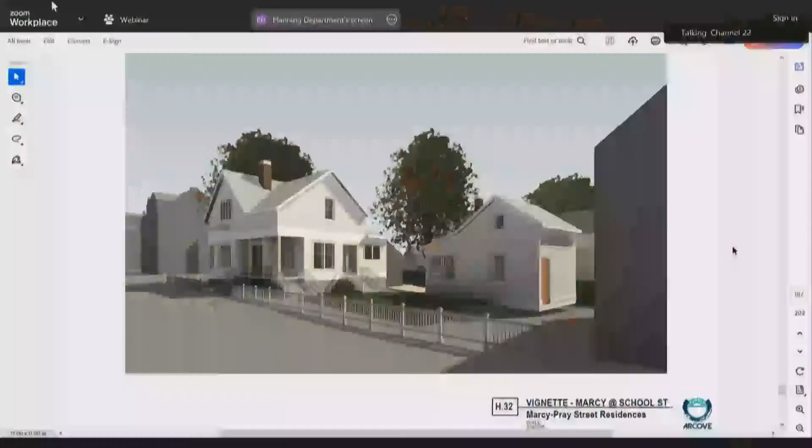Typically you'd see a cape with an eave height of maybe 8 feet or so. This is a little higher, which is why we've introduced that horizontal band across at the 8-foot level, and then the eave is a little above that. All along Marcy Street you see that same dimension with the 1.5-story gable houses across the street - those have a floor level at that band. This floor level behind the wall is a little taller, but it looks the same from the outside by the time you're all done.

Traditional materials: wood, asphalt shingles, Marvin aluminum clad windows, brick chimneys for the fireplaces.

Porches. Did we get a letter saying that this requires a board of adjustment or something? The ADU would require a conditional use permit, but we're not looking to do any variances or anything outside of the ordinance for ADUs or garages or any setbacks.

I think the concern was a traffic and safety issue off of Pray Street, and that's not us. We got a letter from the public - someone was concerned about adding more cars to Pray Street, which is very narrow.

But again, that's not the case. So I should clarify, the Pray Street house would have a driveway, as would any house. When we did meet with TAC on the previous project, we had tried to put that driveway on Partridge Street per the requests of the neighbors who didn't want a driveway, but the fire department had safety concerns with that. If there was an emergency, they would bring their trucks to Pray Street, but they wouldn't be able to park their vehicles because the driveway would be on Partridge.

So, if anyone wants to look closer at the details, the printouts show the pattern of the siding and the dimensions of the trim.

One thing - I'm going to kind of echo what Dave was saying - but on the Pray Street building, that dormer, to me, it just looks more massive. In reality, it's the same size as the other dormer, but I think the other dormer is broken up.

It makes it look lighter with the 3 windows. And I don't mean solar lighter, I mean lighter in composition. As opposed to the 2 windows. That's just my take on it. That's just because there were closets back there, but we can look at fenestrating closets. There's closets and windows - form follows function.

But we can look at lightening it up. I know there's obviously a shed dormer on a cape at the end of Pray Street that you saw earlier this evening. That was one of the other inspirations for the shed dormer motif, but that has more of a glass to wall ratio than what we show on the Pray Street house. So we can certainly look at that.

I hate to bring a classic design to these bay windows to cure this problem that David has brought up with the boxiness of your 15 inches of trim over the windows. You could have panels over or under that bay window, and that would give the front of the house an older look. I know that's not necessarily what you're trying to do, but he is right, that is awkward - the boxiness over the 2 bays.

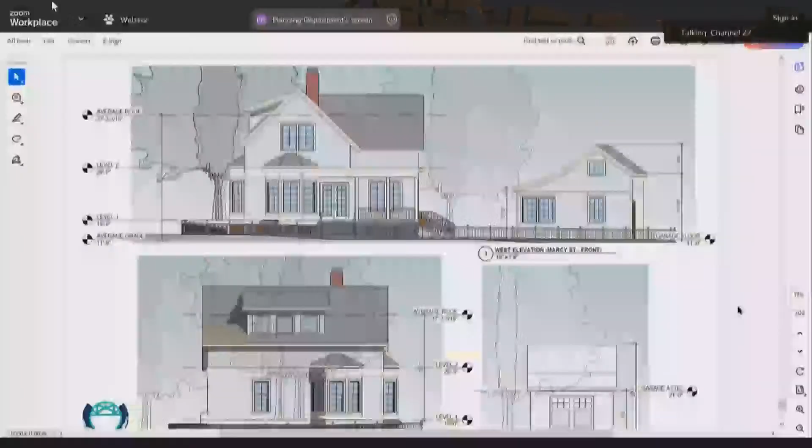We'll keep those if we can, for sure. The one along Pray Street is very close to the foundation, so we're hoping, but we need to meet with some arborists on those to make sure we can do that.

That would be valuable information to share with us. Yeah, if we could have a plan with regard to that, because it took 70-plus years for these trees to be here, and putting in some saplings is always disappointing.

Well, the giant Norway maple in the back is one of the reasons we put the houses where they are, to save that primary tree.

Just a thought I wanted to throw out, if there's discussion about how many driveways go out on Pray Street, I think working with this garage and having the driveway come off of Marcy, I personally, as the homeowner, would rather do that than navigate a tiny turn, maneuvering in the snowbanks. But that's technical.

A curb cut on Marcy Street? I am pretty sure the TAC committee wouldn't go for that. Having lived on Marcy Street myself for 25 years, and being hit by cars twice pulling out, it's a dangerous road to pull out between parked cars. Cars park on that side of the road, and they come screaming around the corner from Newcastle in the summer, and it's rough. It's much safer to not do that.